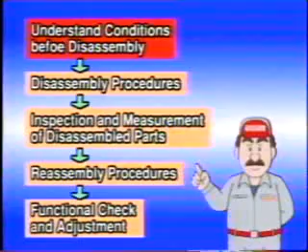This is the general flow of an engine overhaul. Before engine disassembly, it's necessary to understand the engine's condition. The engine must not be disassembled without first understanding any problems the engine has and which parts must be overhauled. After that, begin disassembling the engine.

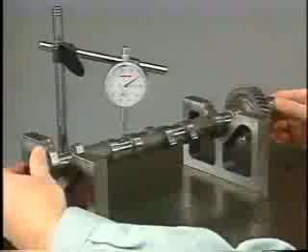Each time you remove a part from the engine, inspect the part as to its assembled state, soiling, wear, flaws, etc. Removed parts should not be inspected all together after complete engine disassembly. It is essential that each part be inspected as it is removed. The disassembled parts must be arranged in order, sorted into those to be replaced and those to be reused. The disassembled parts may be soiled with dirt, dust, or grease, and must be cleaned.

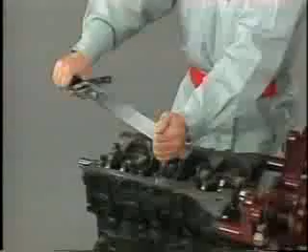The parts should then be reassembled following the procedures specified in the relevant repair manual. Specified tightening torques, adjustment values, etc. must be followed. Pistons, crankshaft, and other parts subject to combustion pressure must be lubricated with engine oil before they are installed.

After engine reassembly, each part must be checked for normal function using an appropriate gauge or tester and adjusted if necessary according to the maintenance standards in the relevant repair manual. This checking and adjustment must be carried out after assembling each part, not after assembling all the parts. These are the general procedures for overhaul. Each step contains various cautionary requirements that must be met. Now, let's look at the procedures in detail, step by step.

To find the cause of any engine defect, you must have an accurate understanding of the type of defect. This will enable you to decide which parts of the engine should be disassembled and inspected. Different parts must be disassembled, depending on whether the defect is electrical or mechanical. It must also be determined whether the engine should be overhauled in place on the vehicle or dismounted from the vehicle. The method of defect condition assessment varies depending on the type of defect.

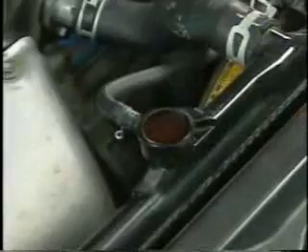If the compression pressure is low, for instance, check whether the pressure is low for all cylinders or for one cylinder only, whether or not the pressure rises when oil is injected through a spark plug hole, and whether or not cooling water bubbles in the radiator when the engine speed is increased.

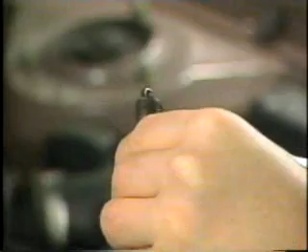If the exhaust is white or bluish purple, oil loss via a piston ring or a valve guide is likely. In such a case, check whether or not the exhaust is a vapor, and whether or not the spark plug is soiled with carbon or wet with oil. This will enable you to narrow the range of suspect parts, saving time and labor and minimizing mistakes. Be sure to understand the engine's condition before disassembling.

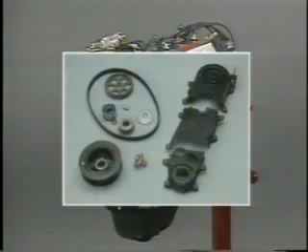The 4AF gasoline engine is composed mainly of these parts. You will learn the specific procedures for disassembling 3 sections of the engine: the timing belt, the cylinder head, and the cylinder block. First, how to remove the timing belt. First, loosen the alternator and remove the drive belt and water pump pulley. Then, remove the spark plugs using an appropriate SST. For each cylinder, check the spark plug for carbon deposits and signs of burning.

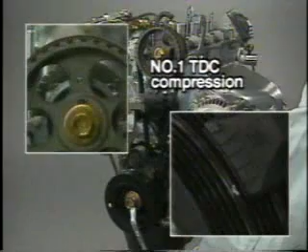Remove the cylinder head cover. Turn the crankshaft in the running direction to align the timing marks on the camshaft timing pulley and crankshaft timing pulley. Position the number 1 cylinder at compression top dead center. Remove the crankshaft pulley using 3 different SSTs. First, loosen the crankshaft pulley bolt, then remove the pulley.

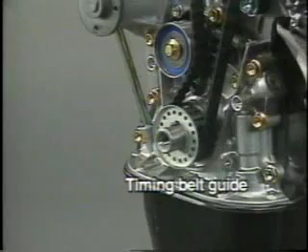Remove the timing belt covers and timing belt guide. At this time, with chalk or a similar marker, draw an arrow showing the rotating direction on the rear side of the timing belt and idler pulley. This enables keeping the same fit of the timing belt. Loosen the idler pulley bolt. Loosen the timing belt and temporarily tighten the bolt.

Then remove the timing belt and idler pulley. Be careful not to bend or twist the timing belt excessively. Do not allow the belt to come into contact with water, oil, or steam. Remove the crankshaft timing pulley and camshaft timing pulley. This completes removal of the timing belt.

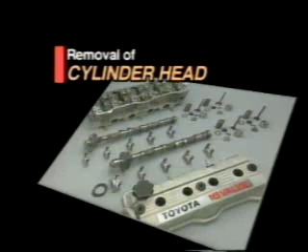Next, the cylinder head is removed. Remove the distributor, water pump, alternator, carburetor, and manifolds in advance.

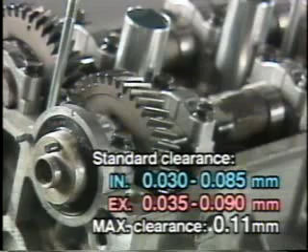Measure the camshaft thrust clearance. To do this, attach a dial gauge vertically to the camshaft end and move a screwdriver back and forth in the clearance. The standard clearance values are shown here. If the clearance exceeds the maximum permissible value of 0.11 millimeters, replace the camshaft or the cylinder head.

Remove the intake and exhaust camshafts. Turn the intake camshaft until the service bolt hole comes to the top. With the service bolt hole in this position, the number 1 and number 3 cylinder cam lobes will push their valve lifters evenly, minimizing the load from the valve.

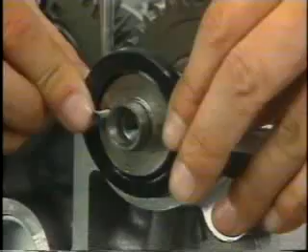Then remove the number 1 bearing caps of the intake and exhaust camshafts and remove the oil seal. Holding the intake camshaft with a wrench, secure the sub-gear to the driven gear with a service bolt.

Remove the intake camshaft bearing caps in this order: number 5, number 2, number 4, and number 3. To remove the bearing caps, uniformly loosen the bearing cap bolts little by little. For the number 3 bearing cap particularly, loosen the bolts very carefully, little by little, in several passes, so that excessive force is not applied to the thrust portion.

To remove the subgear by removing the intake camshaft, mount the hexagonal wrench head portion of the camshaft to a vise using a protector made of aluminum or the like. Insert 2 bolts in the service holes of the camshaft subgear as shown. Inserting a screwdriver between the 2 bolts, remove the service bolt while removing the camshaft.

Remove the snap ring using an SST. Remove the wave washer, subgear, and camshaft gear spring. Since the subgear is retained by the camshaft gear spring, be sure to fix the subgear with a service bolt. Then remove the camshaft.

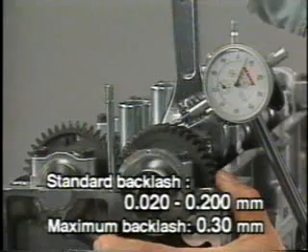To measure camshaft gear backlash, reinstall the intake camshaft with the subgear removed and the bearing caps on the cylinder head. Moving the camshaft, measure the backlash with a dial gauge applied vertically to the teeth surface of the exhaust camshaft gear. The maximum permissible backlash is 0.3 millimeters.

Turn the exhaust camshaft so that its knock pin comes to the position shown, allowing the number 1 and number 3 cam lobes to push their valve lifters evenly. Remove the exhaust camshaft bearing caps in this order: number 5, number 2, number 4, and number 3. When removing the number 3 bearing cap, loosen the bearing cap bolts little by little, carefully, in several passes, as with the intake camshaft bearing caps.

Now the camshafts have been removed. During these procedures, be careful not to apply excessive force to the camshafts or damage the thrust portion on the cylinder head side with a tool or other object. This could cause problems such as camshaft seizure or breakage after the engine is reassembled.

Now the cylinder head is removed. Using an SST, loosen and remove the 10 cylinder head bolts in this sequence. Then remove the cylinder head and gasket, taking care not to scratch the cylinder head and cylinder block surfaces.

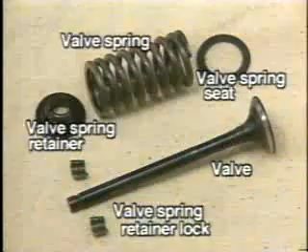Disassemble the cylinder head. First, remove the valve lifters. Using an SST, release each valve spring retainer lock. Then, remove the valves, valve spring retainers, valve springs, and valve spring seats. Remove the oil seals. This completes cylinder head removal.

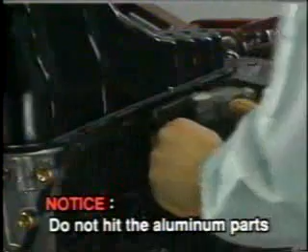Now let's look at the procedure for removing the cylinder block. First, disconnect the oil pan from the cylinder block using an SST. Then remove the oil strainer, the oil pump, and rear oil seal retainer.

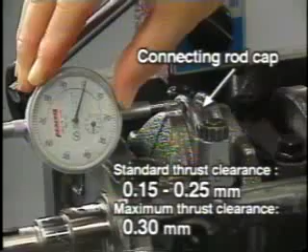Measure the connecting rod thrust clearance with a dial gauge attached to the connecting rod cap. The standard thrust clearance is 0.15 to 0.25 millimeters, and the maximum permissible clearance is 0.30 millimeters. If the clearance exceeds the maximum value, replace the connecting rod with a new one.

Before disassembling the cylinder block, stamp a match mark on each connecting rod and bearing cap. For example, stamp 1 mark on the number 1 connecting rod and bearing cap, 2 marks on the number 2 connecting rod and bearing cap, and so on. This helps ensure correct reassembly.

Remove each bearing cap and place a short vinyl tube on each connecting rod bolt so that bolts do not scratch the cylinder bore surface. Carefully remove the piston and connecting rod assemblies from the cylinder block.

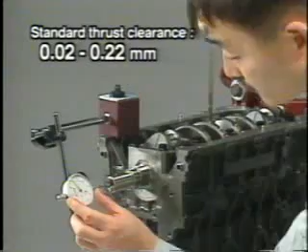Before removing the crankshaft, measure the crankshaft thrust clearance with a dial gauge. The standard clearance is 0.02 to 0.22 millimeters, and the maximum permissible clearance is 0.30 millimeters. If the clearance exceeds the maximum value, replace the thrust washers.

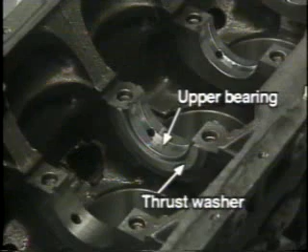Remove the crankshaft. Gradually loosen and remove the crankshaft bearing caps in this order. Then remove the upper bearings and thrust washers. Arrange the removed bearings, bearing caps, and thrust washers in order so that they can be reinstalled in their correct positions.

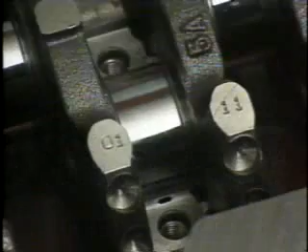Here, let's look at the method of measuring the oil clearance of each crankshaft bearing. Install the upper bearing on each bearing cap, aligning the oil holes. Place the crankshaft on the cylinder block. After cleaning the journal bearing with waste cloth, set a piece of plastigauge axially on the crank journal and install the bearing cap.

Apply a thin coat of engine oil to the threads and bearing surface of each bolt. Do not turn the crankshaft during measurement. The cap tightening torque is 610 kilogram centimeters.

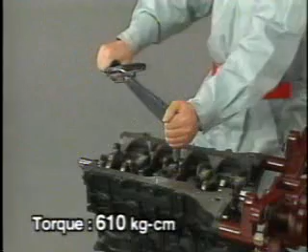Remove the bearing cap and measure the width of the plastigauge at the widest portion. The standard oil clearance is 0.015 to 0.033 millimeters, and the maximum permissible clearance is 0.10 millimeters. If the oil clearance exceeds the maximum value, replace the bearings. Also, measure the oil clearances of the connecting rod bearing and camshafts using the same method, using plastigauge.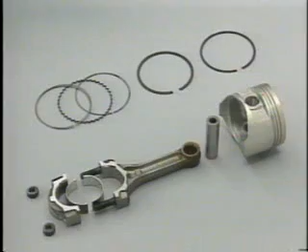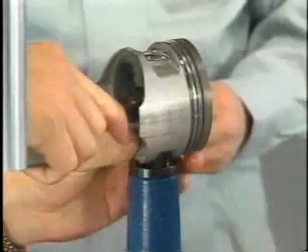Finally, disassemble each piston and connecting rod assembly. Remove the piston rings using a piston ring tool. Using 4 different SSTs and a press, remove the piston pin from each piston. To do this, set the SSTs at these positions to ensure that the load is applied vertically to the piston pin. Never pry the piston pin, or it could become unremovable. Slowly and carefully apply pressure to remove the connecting rod from the piston.

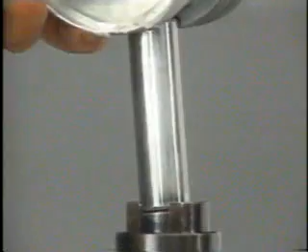This completes cylinder block removal. Be sure to arrange all removed parts in the correct order to save labor and time in later reassembly, as well as to avoid incorrect reassembly. Place the removed parts on a parts stand or arrange them in order with a numbered slip on each part. Return each removed machine screw or pin to the part from which it was removed.

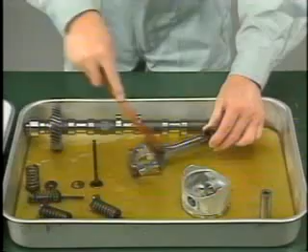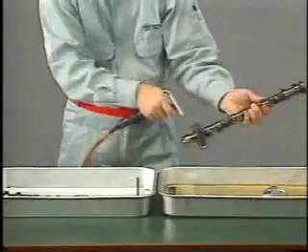Disassembled parts must also be cleaned. Check each part for carbon deposition and flatness and clean it. If parts are inspected without cleaning, it is difficult to find defects. In addition, foreign matter may adhere or enter during inspection, adversely influencing the performance of the reassembled engine. Washing and cleaning are extremely important in maintenance work.

Now, let's look at the inspection methods. As advised earlier, you must inspect parts as they are removed. You will waste time if you inspect parts after disassembling the engine completely. Master the inspection method so that you can inspect parts while removing them.

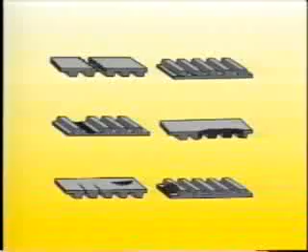Let's begin with inspection of the timing belt. Visually, thoroughly inspect the removed timing belt. If the belt is broken, improper installation is the likely reason. Cracking or damage to belt teeth indicates camshaft seizure. Cracking or noticeable wear of the belt face indicates timing belt idler seizure. If any of these defects is found, inspect the parts suspected of causing the problem.

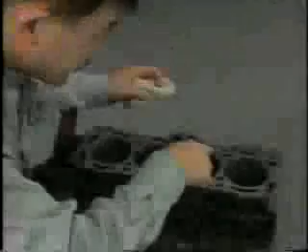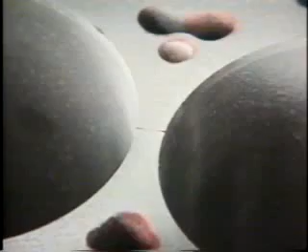The cylinder head and the cylinder block are inspected at the same time. First, check the cylinder head and cylinder block for cracks and damage. If the cooling water level is abnormally low, or if the engine oil is opaque, damaged parts are likely. Check for cracks and other damage visually or with a dye penetrant. Cracks appear as red lines like these. Similarly, check each connecting rod and the crankshaft for cracks and damage.

Next, measure cylinder block top surface warpage. The maximum permissible warpage is 0.05 millimeters. For any of these surfaces, if warpage exceeds the specified maximum value, grind to correct it or replace the part.

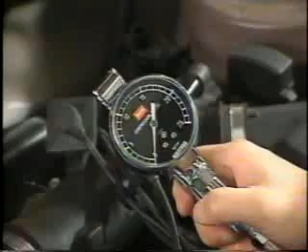If compression pressure is abnormally low or there is oil loss via the valve guides, the valves must be inspected. First, check each valve face and stem for damage and streaking. Then, measure the overall length of each valve. The minimum permissible length is 90.95 millimeters for the intake valve and 91.40 millimeters for the exhaust valve.

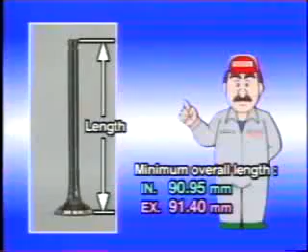Also, measure the outside diameter of each valve stem. The minimum permissible diameter of the stem is 5.930 millimeters for the intake valve and 5.925 millimeters for the exhaust valve. If any of these measurements is smaller than the specified minimum value, replace the valve.

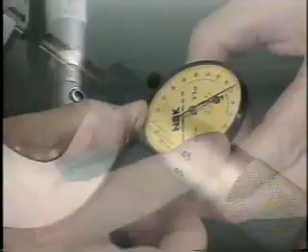Using a caliper gauge, measure the inside diameter of each valve guide stem. This measurement must be taken in 2 directions at a total of 6 positions. The standard inside diameter is 6.01 to 6.03 millimeters. If the measurement exceeds the standard range, replace the valve guide stem.

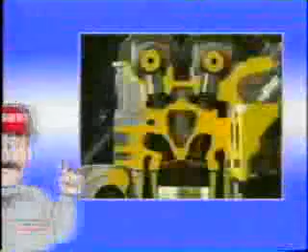If there are no abnormalities in the valves and valve guide stems, inspect the valve seats. Valve seats should also be inspected after valve replacement. Apply a thin coat of red lead primer to the valve face. Lightly press the valve against the seat.

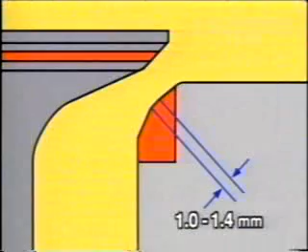Then check that the seat contact is at the middle of the valve face in a constant width along the entire circumference. The standard contact width is 1.0 to 1.4 millimeters. If the contact width is outside this standard range, correct the valve seat.

If the cylinder head makes an abnormal noise, the camshafts must be inspected. This inspection must also be carried out whenever the cylinder head is disassembled for overhaul. First, check each camshaft for circle runout using V-blocks and a dial gauge. Circle runout can be determined from the deflection of the dial gauge. The maximum permissible runout is 0.04 millimeters. If this maximum value is exceeded, replace the camshaft.

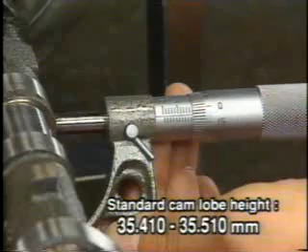Wear on the cylinder inside wall can be determined from the compression pressure measured before disassembly. Normally, the cylinder inside wall tends to wear more in the upper portion, especially in the piston thrust direction. If a piston ring is broken and seized, or if the engine overheats, the cylinder inside wall can be damaged or seize up. It is necessary to check the cylinder bore wall for wear and damage.

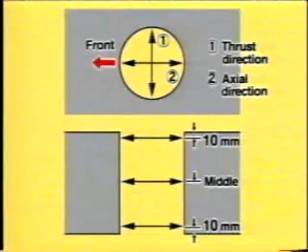Using a cylinder gauge, measure the cylinder inside diameter in the upper, middle, and lower portions, each in 2 directions, for a total of 6 positions. Subtract the minimum measurement from the maximum. If the difference is greater than 0.2 millimeters, bore the cylinder.

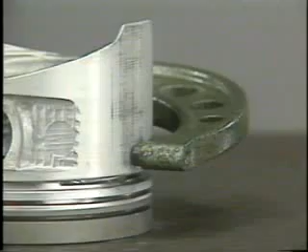If the engine overheats, or if the crankshaft does not rotate, each piston must be checked for damage and deformation. First, using a micrometer, measure the piston outside diameter. With the piston upside down, measure the piston diameter in the thrust direction, 38.5 millimeters from the piston's bottom edge. Subtract this measurement from the minimum cylinder bore diameter measured in the thrust direction. If the difference exceeds the permissible range of 0.06 to 0.08 millimeters, replace the piston or the cylinder block.

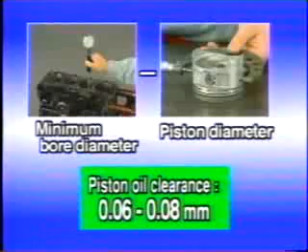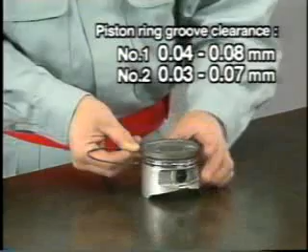If oil consumption is high due to oil loss via the piston ring, or if compression pressure is low, check each piston ring for damage, wear, or seizure. The clearance between each piston ring and ring groove must also be measured. Insert a thickness gauge into the ring groove through the gap between the ring and the groove wall and measure the clearance along the entire circumference.

Also, measure the piston ring end gap with a thickness gauge. For measurement in the cylinder bore portion with the least wear, use a piston to push the piston ring into the cylinder bore to an 87 millimeter depth from the cylinder block's top surface.

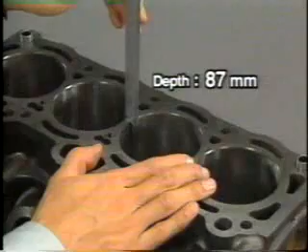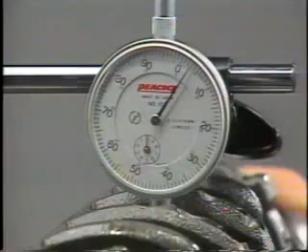Now the crankshaft will be inspected. First, inspect the crank journals and pins for damage and seizure. Then, using V-blocks and a dial gauge, measure the circle runout of the crankshaft. The circle runout can be determined from the deflection of the dial gauge as the crankshaft is rotated once. The maximum permissible runout is 0.06 millimeters.

Using a micrometer, measure the crankshaft diameter at these journal and pin positions. Calculate out of roundness and taper. At both journal and pin positions, the maximum permissible out of roundness and taper values are 0.02 millimeters. If there is conspicuous streaking or seizure on the crankshaft, or if circle runout or uneven wear exceeds the specified limit, replace the crankshaft.

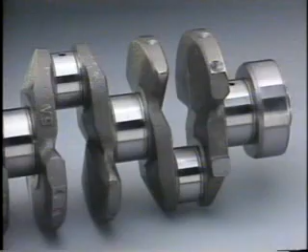You have studied the major inspection methods of disassembled parts. Various other inspections may be required depending on the problem. Master proper inspection methods with reference to the repair manuals.

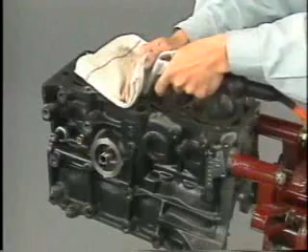After the disassembled parts have been inspected and corrected, they are to be reassembled into an engine unit. In reassembly, check each part carefully for foreign matter. Clean the rear side of each bearing to remove dust and grease. Using compressed air, remove foreign matter from each oil hole and bolt hole of the cylinder block.

This video will show the specific reassembly procedures for 3 sections: the cylinder block, the cylinder head, and the timing belt. Let's begin with piston part assembly. Using 5 different SSTs and a press, join each piston and connecting rod. Be careful not to deform the piston. Align the front marks of the piston and connecting rod.

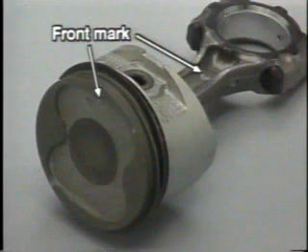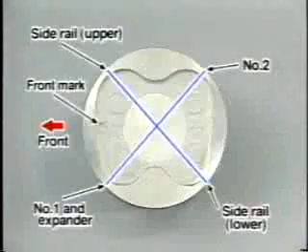Install bearings in the connecting rod and bearing cap. At this time, be sure to install the correct bearings matching the numbers. Install piston rings using a piston ring tool. Be careful to install the correct piston rings. At this time, ensure that the front mark of each piston comes at the front and that the piston ring end gaps are positioned as shown.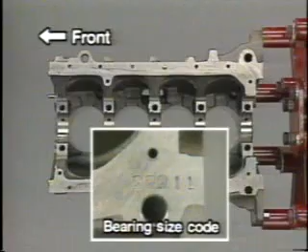Next, crankshaft parts will be installed. Aligning the oil holes, install the upper bearings with oil grooves on the cylinder block. Install the lower bearing in each bearing cap. Also, be sure to install the correct bearings matching the numbers. You can select the correct bearing this way. Add the numbers stamped on the cylinder block to the number on the crankshaft and select a bearing having the same number as the sum.

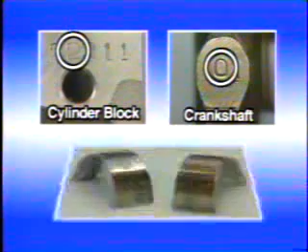In the present engine, for example, 2 is stamped on the cylinder block and 0 on the crankshaft for the number 2 main journal. 2 and 0 make 2. Therefore, the appropriate bearing number is 2. Correct bearings for other cylinders can be selected in the same way. Install the upper thrust washers on both sides of the number 3 journal of the cylinder block with the oil grooves facing outward.

Lubricate the bearings in the cylinder block with engine oil and install the crankshaft. Then, install the flanged lower thrust washers on both sides of the journal of the number 3 crankshaft bearing cap with the oil grooves facing outward. Set the bearing caps in numerical order with the arrows facing the front.

Apply a thin coat of engine oil to the threads and bearing surface of each bearing cap bolt and temporarily tighten the bolts little by little in several passes. Then tighten bolts to the specified torque, 610 kilogram-centimeters. After that, check that the crankshaft turns smoothly. Install the piston and connecting rod assemblies. First, lubricate each cylinder bore and piston with engine oil. Be sure to lubricate the crank pins as well.

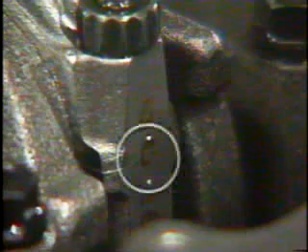Using a piston ring compressor, push each piston and connecting rod assembly into the appropriate cylinder. Place a short vinyl tube on each connecting rod bolt to prevent damage to cylinder inside wall and crank pin. Install a bearing cap on each connecting rod with the front mark facing forward. Temporarily tighten the bearing cap nuts uniformly, little by little, in several passes. Confirm that the mated bearing cap and connecting rod have the same match mark, which was stamped in disassembly.

Tighten the nuts to the specified torque of 500 kilogram-centimeters. Measure the connecting rod thrust clearance. Then check that the crankshaft turns smoothly. Now, let's look at the method of installing the cylinder head. Removed gaskets and oil seals must all be replaced with new ones. Prepare new gaskets and oil seals before beginning cylinder head installation.

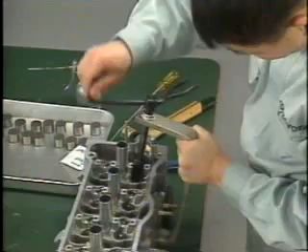First, install the oil seal, valve, spring seat, valve spring, and valve spring retainer in the cylinder head. Using an SST, install the valve spring retainer lock. Lightly tap the valve stem top with a plastic-faced hammer to ensure a proper fit. Install the valve lifter and shim.

Place the cylinder head gasket on the cylinder block in the correct orientation and on the correct side. Place the cylinder head in position on the cylinder block. At this time, do not slide the cylinder head on the cylinder block because the cylinder head's bottom face could be scratched by the knock pins. Lubricate the cylinder head bolt threads with engine oil and set the bolts in the bolt holes.

Using an SST, tighten the bolts little by little in this sequence in several passes. The specified tightening torque is 610 kilogram-centimeters. For a 4AFE engine, the method called yield point fastening is used to tighten the cylinder head bolts. First, tighten the cylinder head bolts to the specified torque of 300 kilogram-centimeters using an SST.

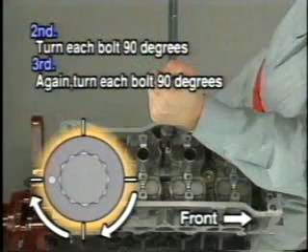After tightening the bolts, mark each bolt head with paint at a point toward the cylinder head front as shown. Then turn the bolts 90 degrees and another 90 degrees in this sequence to retighten. Cylinder head bolt tightening is complete when the front mark on each bolt head has been turned 180 degrees from the original position.

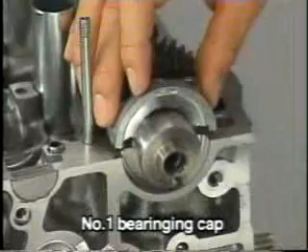Next, install the exhaust camshaft on the cylinder head, taking care of the knock pin position. Apply seal packing to the number 1 bearing cap of the exhaust camshaft at the position shown, and install the bearing cap in the proper position on the cylinder head. Install the remaining camshaft bearing caps on the cylinder head and tighten the bolts to a torque of 130 kilogram-centimeters in this sequence.

Apply MP grease to the entire lip circumference of a new oil seal. Using an SST, insert the oil seal as deeply as possible into the cylinder head. Rotate the exhaust camshaft so that the installation mark is positioned as shown. Install the intake camshaft according to the installation mark.

Install the number 3 bearing cap. Carefully tighten the bearing cap bolts little by little in several passes. Install the remaining bearing caps in this sequence. The specified tightening torque is 130 kilogram-centimeters. Remove the service bolt that fixes the subgear and tighten the bolts of the number 1 bearing cap. This completes installation of the camshafts.

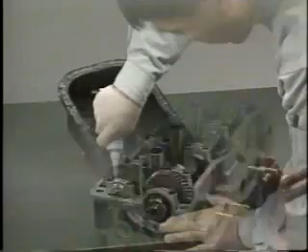The oil pan will now be installed. Apply seal packing to the oil pan continuously. For the bolt holes, apply it inside. Then, before the seal packing has dried, install the oil pan on the cylinder block.

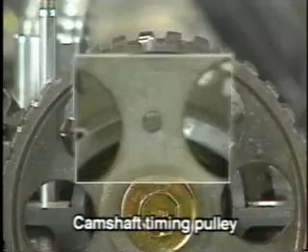Now, let's look at the procedures for installing the timing belt. Install the camshaft timing pulley and crankshaft timing pulley. Temporarily install the idler pulley of the timing belt and install the tension spring. Position each timing pulley at the top dead center mark and set the number 1 cylinder at compression top dead center. Install the timing belt in the correct direction while checking the arrow mark put on the belt when it was disassembled.

Loosen the idler pulley bolt and tighten the timing belt. Temporarily tighten the crankshaft pulley bolt, and turn the crankshaft 2 times in the forward direction. Tighten the idler pulley bolt. Then check the timing marks for alignment. If they're not aligned, remove the timing belt and reinstall it. Tighten the idler pulley bolt to the specified torque of 375 kilogram-centimeters.

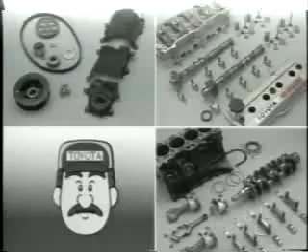Install the timing belt guide and timing belt covers. Using SSTs, tighten the crankshaft pulley bolt while fixing the crankshaft pulley. The tightening torque is 1,200 kilogram-centimeters. You have now learned the procedures for installing the cylinder block, cylinder head, and timing belt. For further details and tips on each installation method, refer to the appropriate repair manuals.

When the engine has been reassembled, each part must be checked for normal function. Here, you will learn the minimum requirements of this check. The valve clearance must be checked first. Tighten each camshaft bearing cap to the specified torque of 130 kilogram-centimeters. Then, measure the valve clearance at the positions shown. The standard clearance is 0.15 to 0.25 millimeters for the intake valve and 0.20 to 0.30 for the exhaust valve. If the standard clearance value is not met, replace the shim using an SST and adjust the clearance.

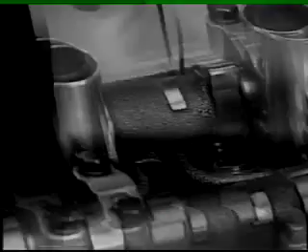An ignition timing check is also important. Check the ignition timing using a tune-up tester and a timing light. For an EFI engine, check the idle ignition timing with the check connectors TE1 and E1 linked by a check wire harness. Engine overhaul is now complete.

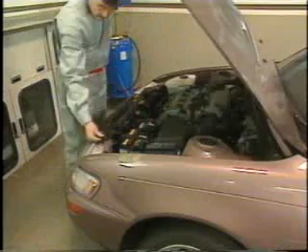Finally, let's review the entire workflow of an engine overhaul. Before disassembly, the engine's condition must be understood. Then disassemble the engine while inspecting each part removed. Then sort and clean the removed parts and reassemble them. Finally, each part of the reassembled engine must be checked as to function and adjustments made if necessary. Each of these steps must be carried out very carefully.

Engine problems can be rather complex, since they can be due to a variety of factors. The key to proper overhaul is to precisely understand the nature of the problem, so that you can save labor and time and avoid possible mistakes. Improve your skill in overhaul, observing the basic rules.